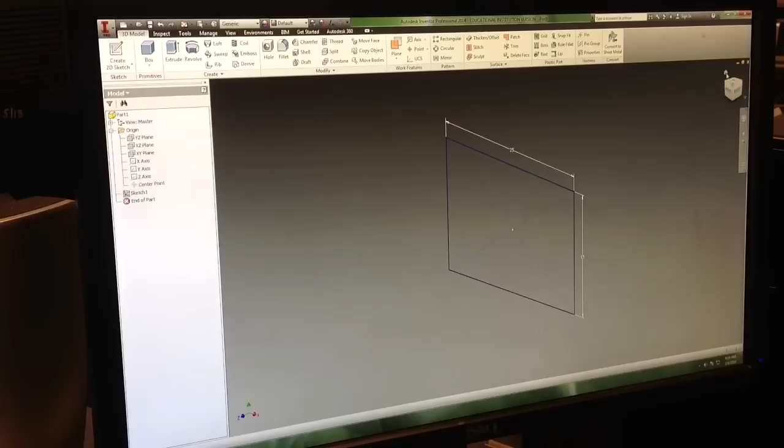Alright, step 2 of drawing our 3D model. I have my rectangle on my screen. If I click on my view cube, this view cube is going to be very important to you throughout your Autodesk experience. I have my home view, which is that little house. I like my house. I click on there and it shows me,

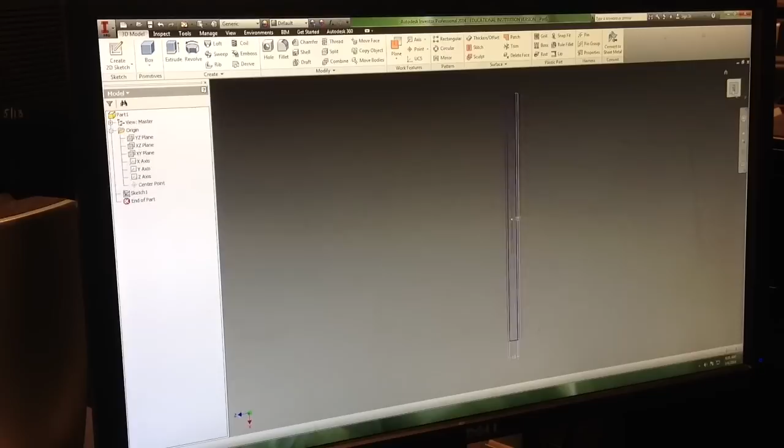puts it in basically an isometric view. It puts it so you can see the whole model, and it puts it so it fills up the screen. I can also look at the front view. I can look at the top view, which doesn't do us much good when we have a shape because there isn't any depth to it. So I'm just going to click on my home view.

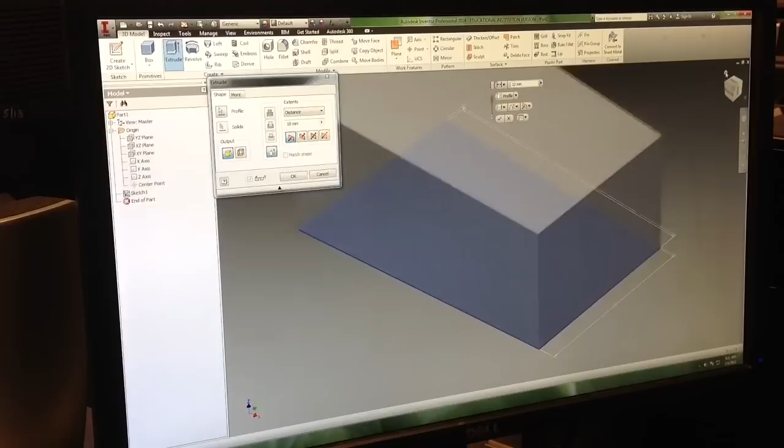Now, what we see them do in the video after they finish the sketch is they extrude it. So we're going to extrude. Simply click on extrude. That fills up too much space. So I'm going to click on my house and get it so the whole thing's in the screen.

I can extrude it in direction 1. Direction 2 goes the opposite way so that my sketch is on the surface. I can have symmetrical, so half of it goes direction 2, half of it goes direction 1. Whichever way you want to do it is okay.

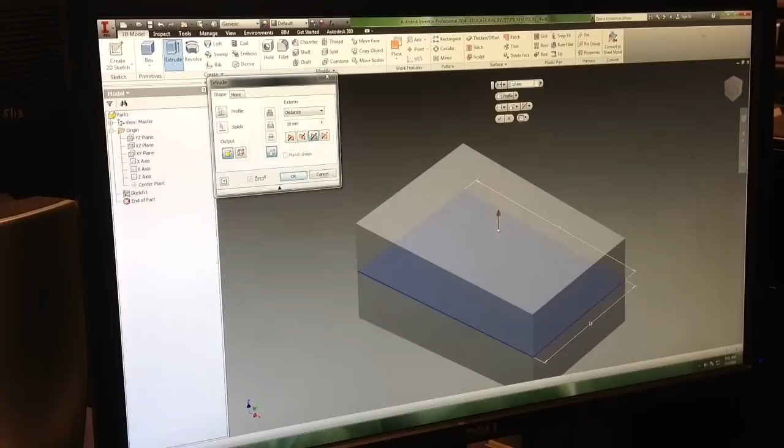Over here, you can change how big it is. I can go 10 millimeters, I could go 100 millimeters, and that makes it gigantic. Zoom out, it's really tall. I don't think I want it that tall. I'm going to make it 10. Then I'm going to click OK. Click on my house, and there's my nice rectangular prism.

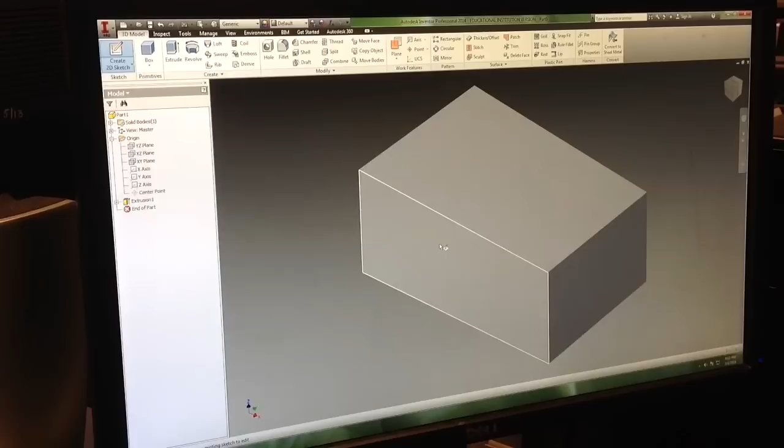Now we need to put a cylinder on the rectangular prism. The way you do that is create 2D sketch and then decide where you want to put that cylinder. Do I want it on this surface? Do I want it on this surface? Do I want it on this surface? I'm going to put it right here.

Flips it around so I can see it in a nice two-dimensional view instead of in that three-dimensional view because I am creating a 2D sketch. I'm going to come up here to circle. Again, there are 2 circle options. I just want center point. Circle center point. I come down here, I click one time, and I drag.

At this point, you could enter the number 5 and have it exactly the size you want, or you can do that after you've drawn it. So I'm going to show you that way to dimension it after the fact. So simply click on some random number and then right click. So this is the first time I'm asking you to use right click. If you right click, you can say OK and you can be done drawing circles.

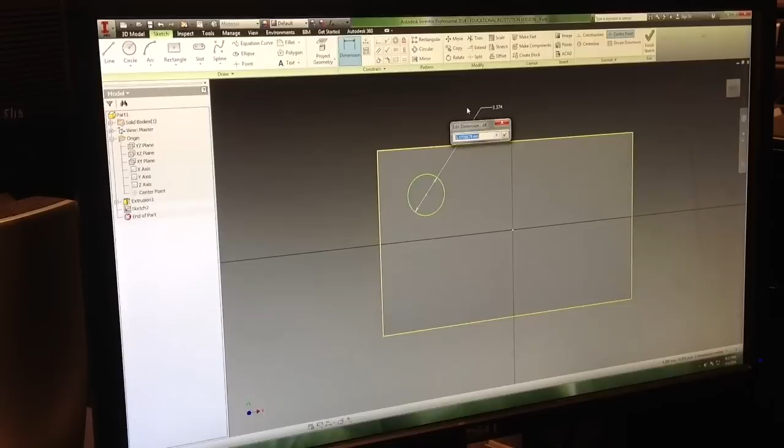I'm going to click on dimension, click on the edge of the circle, drag it, click, and now I can specify how large I want that circle. I'm going to type 5, hit enter, and it did something wild. It did something that bothers you a lot, bothers me a little bit, but I know how to fix it. So it shot that circle off the edge of my sketch plane. I want it to be in the middle of this rectangle.

I'm still on dimension. So I'm going to click on the edge of the rectangle and a random point on the edge of the circle. And then I'm going to drag it up here and click. I'm going to enter 5.

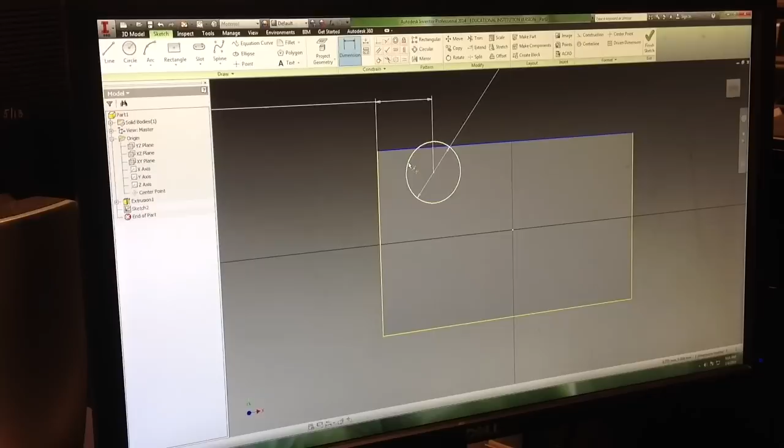Now I'm going to do the same thing with the top edge. So I'm going to click on that edge, random edge on the circle, drag it, click, 5, enter. Now my circle is where I want it to be on the face of that rectangular prism. So I'm going to hit Finish Sketch.